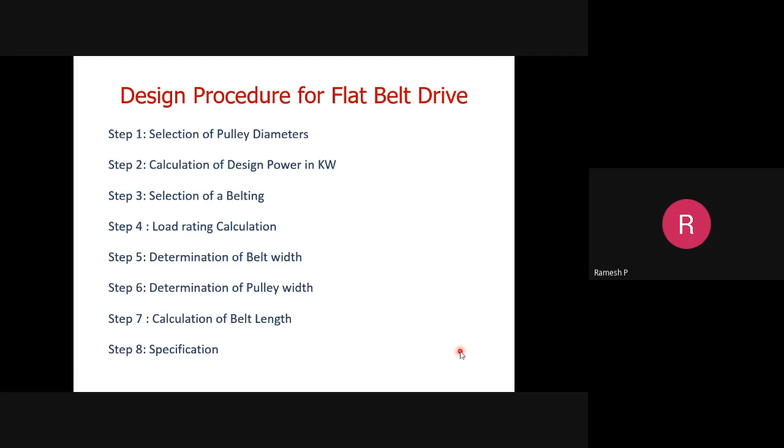So we have discussed this. The design procedure of flat belt drive involves 8 steps. We have also seen the 8 major steps. And as I said earlier, this will be the team.

I will provide assignment questions, and meanwhile at some time I will ask questions. We will treat this like a game. I used to calculate the scores for individual teams. We will work on this.

Okay, these are the procedures. I hope you have seen it. And this is where we concluded in the previous session, and I have even provided this as homework. Already you are at home, meanwhile a classwork at your home.

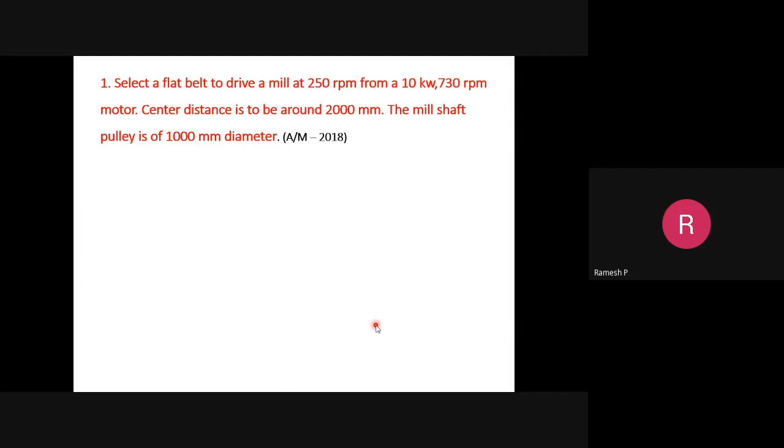So the part B, first question. We will commence the session by designing a solution to this problem of flat belt drive. So I'll read out the question: Select a flat belt to drive a mill at 250 rpm from a 10 kilowatt 730 rpm motor.

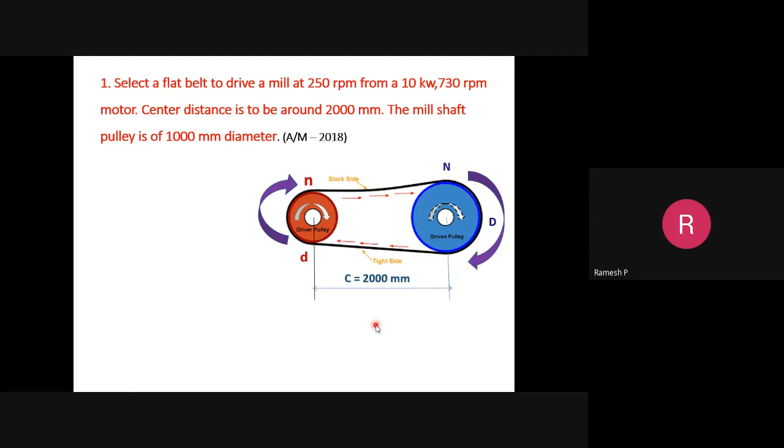Center distance is to be around 2000 mm. The mill shaft pulley is of 1000 mm diameter. It is clearly mentioned this is a flat belt drive, which is operating for a milling application.

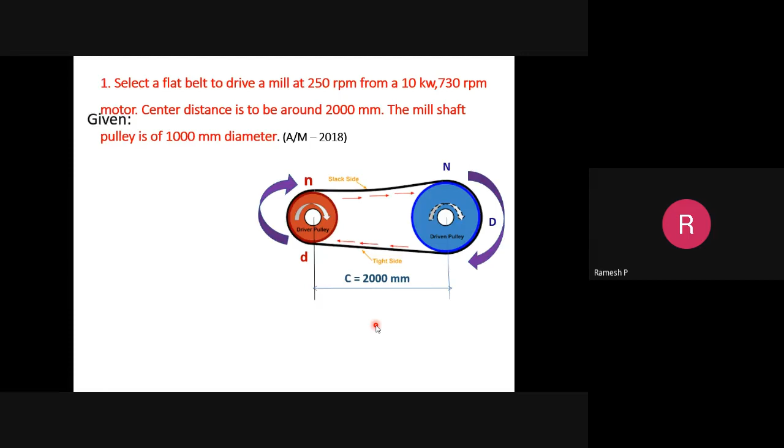Here they have provided the speed of driver and driven. As I have already mentioned, the driver or driving pulley notations, I suggest you look upon this notation because it makes sense and looks similar when compared with other texts. So the smaller case n and smaller case d refer to the speed and diameter of the driver pulley, and the larger uppercase N and uppercase D represent the speed and diameter of the driven pulley, or follower pulley.

So here you have to read the question properly. One of the important mistakes students make is they quickly interpret the question and take the data in a wrong sense. Here, a flat belt drive to drive a mill at 250 rpm from a 10 kilowatt 730 rpm motor. So the motor runs at 730 rpm and the rated power provided for this design is 10 kilowatt.

They have also mentioned the speed of driven, which is 250 rpm, and the center distance is provided. Center distance is the distance between the centers of both pulleys, between the center point of the driver pulley and the center point of the driven pulley, which is 2000 mm. And the mill shaft pulley, which is the application end, which is the driven pulley, is 1000 mm in diameter.

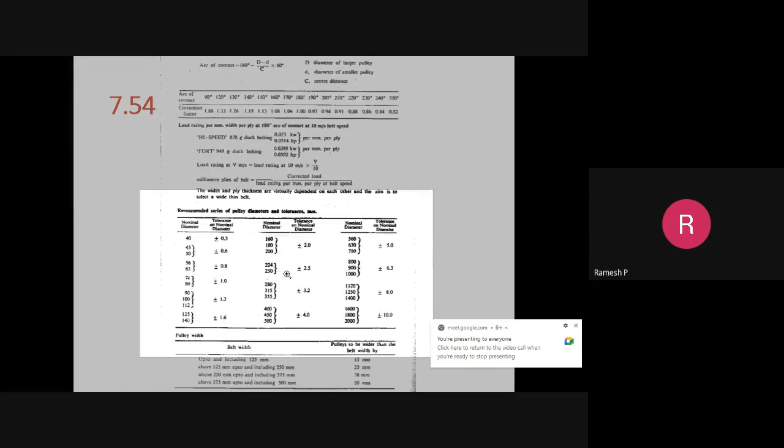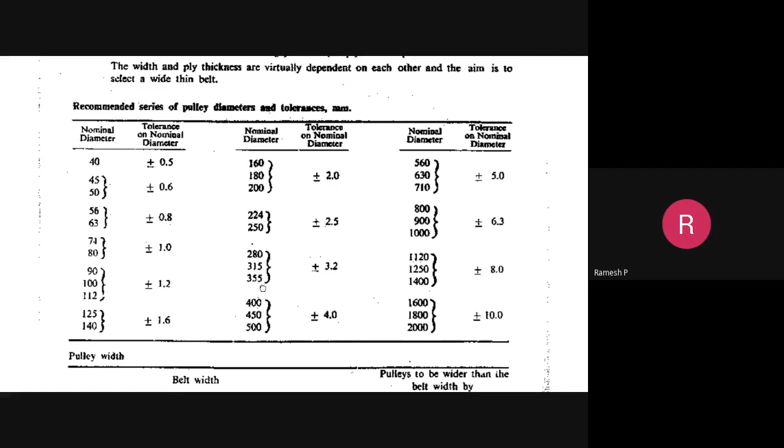How do I calculate? From page number 7.54, I used to take up recommended pulley diameter. Hope you have taken the printout of page number as I have suggested earlier. So, recommended series of pulley diameter - you have to refer this table and choose the appropriate one. So since here it is 342, always it is preferable to take the nearest maximum one, which is 355.

So whatever value you get based on the calculated diameter, you have to choose the standard recommended series of pulley diameter. So since we have got the diameter of driver pulley as 355 mm, the second step for flat belt drive is calculation of design power.

Design power is the maximum safe operating power which is needed for your design. This design power consists of various load conditions and the corresponding working environment for the belt drive. We know that design power can be calculated using the equation: product of rated power, given rated power, with the product of load correction factor, which we use to correct based on the different application where the specific component is being utilized, and the arc of contact factor.

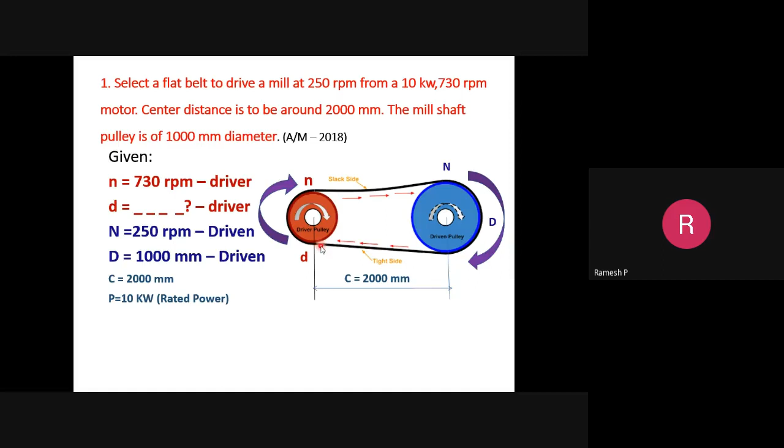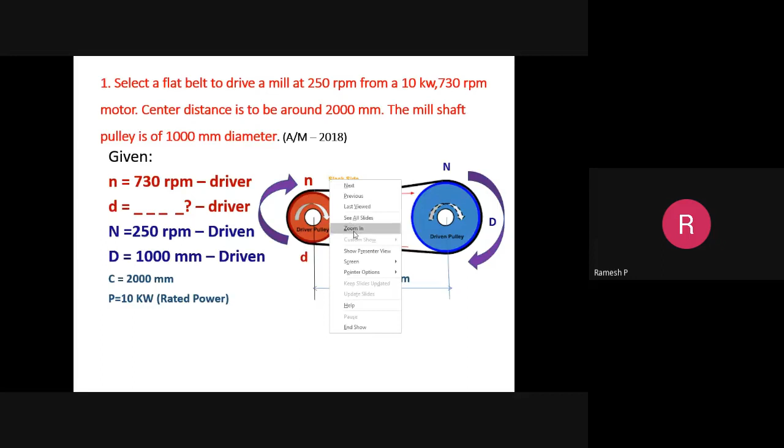What will be the arc of contact which has taken place? As I said in the previous session, arc of contact - what is it? The angular contact which exists between the pulley and the belt. The belt starts touching the pulley from this point and leaves at this point. So I calculate what will be my angle. This angle of contact, or arc of contact, is to be calculated such that the corresponding factor based on the data book gives us the product of that factor.

Okay, so rated power which is given in the question is 10 kilowatt, and the load correction factor.

How do I calculate load correction factor? I hope you did this. Here I have chosen the load correction factor as 1.3. From page number 7.53, you can choose the LCF, that is load correction factor. Here in the question it is mentioned as for the application of milling. You have to refer to the question based on which application it is provided. If it is for different printing machineries, heavy load application, compressor, evaporators - you have to choose the corresponding load correction factor based on the application provided.

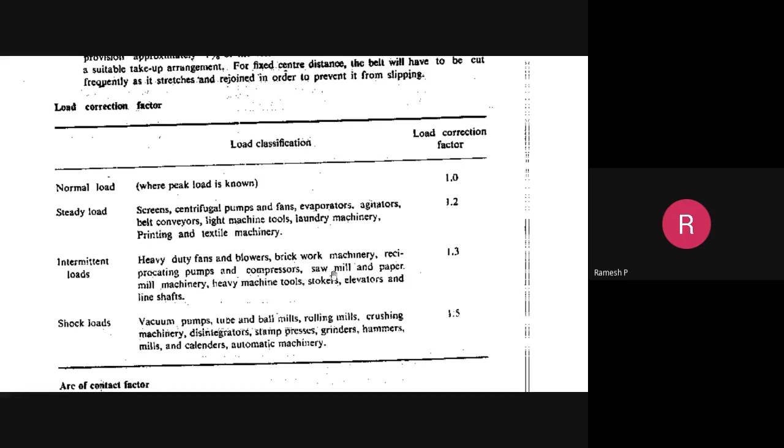You may ask, sir, what if some application is not provided? If it is just simply a flat belt drive with no application given, you can choose whatever you want - just assume a corresponding application. So here, you can refer to sawmill and paper mill machinery in the intermittent loads. Based on this, I am choosing 1.3 as the load correction factor.

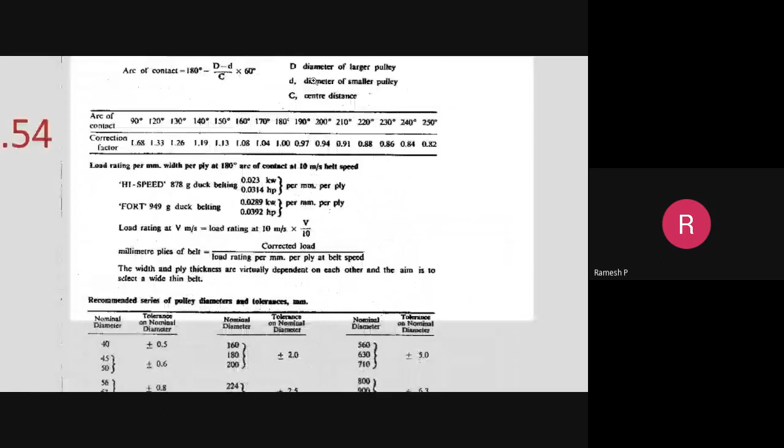So now, after load correction factor, the arc of contact factor. How do I calculate arc of contact factor? From page number 7.54, you can get the values of arc of contact. First, you have to calculate what will be my angle of contact. If you are using the data book, please follow from page number 7.54.

There is an equation for calculating the arc of contact. Since it is open belt drive, it is 180 degrees minus of (D minus d) by C into 60. If it is cross belt, there will be more angle of contact, more arc of contact - there it is 180 plus (D by C into 60), instead of minus it will be plus. So by using this equation, we calculate the degree of arc of contact, and then we take the suitable corresponding factor for calculating the arc of contact factor.

Okay, so for arc of contact we are using this equation, and if you find 180 degrees minus d by c times 60, I am getting the angular contact of 160.65 degrees.

So if you refer page number 7.54, you could get the correction factor for 160 degrees. It is 1.08. If you are getting something like 175, you can take values between 1 and 1.04, or you can take the nearest value.

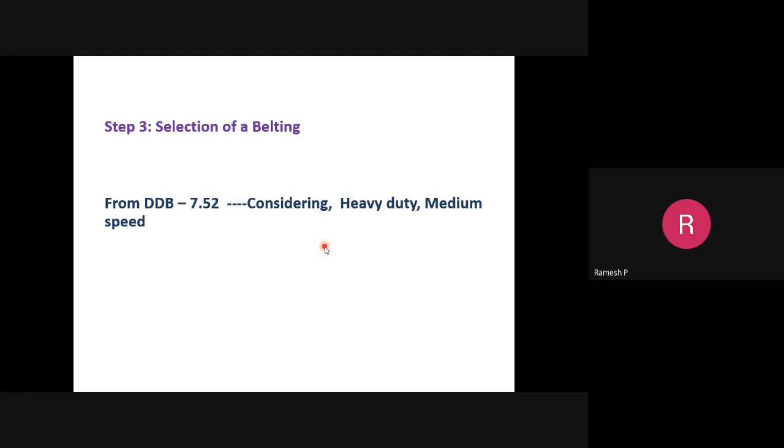Based on this, considering it as heavy duty since milling comes under intermittent load, the application demands intermittent load. Considering heavy duty, we are selecting the Dunlop Fort 949G fabric belt for this design.

Clear? Then we will move on to step 4, load rating calculation. What is the load rating calculation? It is the distribution of load in terms of number of plies and individual load per ply. That's why the unit of load rating is some constant value in terms of kilowatt per ply. Your belt may consist of 4 ply, 5 ply, or 6 ply, and this shows how load is rated per 1 ply.

Wait, yeah see, it is about you can choose because they have not mentioned here which type of mill you are going to opt for. Let me check. See, load correction factor - you can see here it is rolling mill, here it is sawmill and paper mill machinery. I'm just considering it as sawmill or paper mill. That's not an issue, either go with intermittent load or shock load.

Consider whatever you want, but try to mention it in your answers properly. I have considered the design as intermittent load since the mill alone is provided in the question for designing the flat belt drive. So I considered it as sawmill, or else paper mill. Here what you are justifying is ball mill or rolling mill, something else. That's not an issue, you can go with anything.

It is preferable to adapt to the question's specific application provided. I could mention here considering sawmill - that's not an issue. If no application is provided, you can go with any of these.

Is there any other questions? Okay, fine.

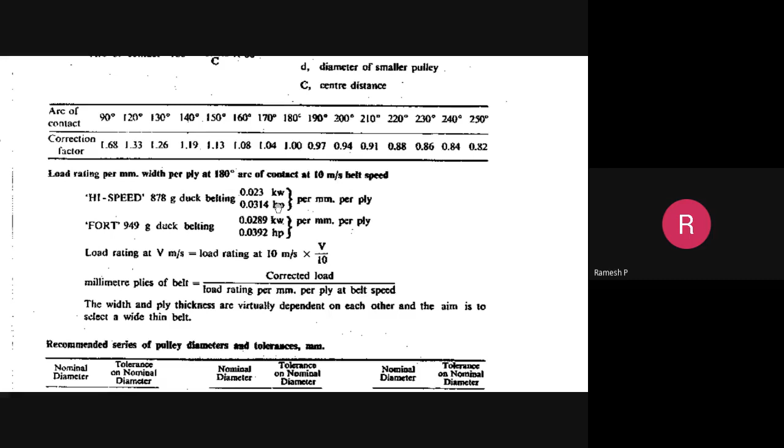Here you could refer to the load rating per mm width per ply at 180-degree arc of contact at 10 meters per second belt speed. So we are going to use this equation to calculate load rating at V meters per second equal to load rating at 10 meters per second into V by 10.

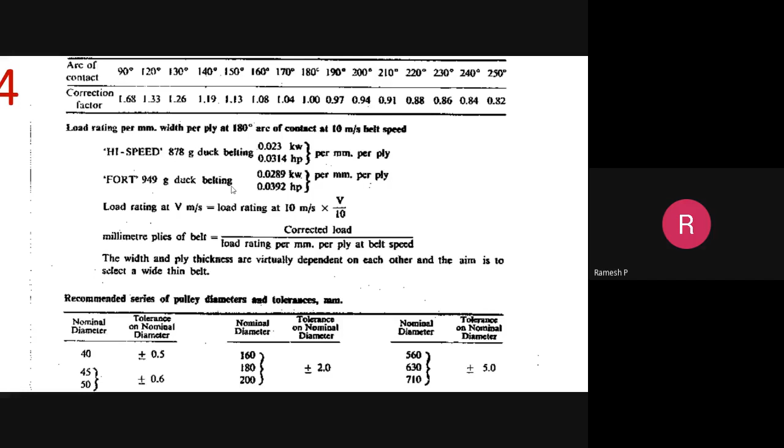This load rating at 10 meters per second is the value for your corresponding belt which you have selected based on the given inputs and application, whether it is heavy duty, steady, or light duty. We have selected 949G duck belting. Again, if the power is mentioned in kilowatt or horsepower, even if horsepower, try to convert it into kilowatt. Here power is mentioned in the question in kilowatt, so it is 0.0289. Clear?

So load rating at 10 meters per second for Fort 949G fabric belting as provided in the data book, I'm taking it as 0.0289, with velocity of the belt divided by 10. I need to calculate the velocity in terms of meters per second.

Using the velocity, this load rating we are considering entirely for the driver. So pi d n by 60. Since d is in millimeter, I am converting, taking velocity in terms of meters per second, so I'm providing 1000 in the denominator. Diameter of driver pulley 355, speed of driver pulley 730, so my velocity is 13.56 meters per second.

So now apply this in the equation provided: load rating at 13.56 meters per second equals load rating at 10 meters per second into 13.56 by 10. This value is 0.0289 kilowatt, which we took from the data book page number 7.54. So my value of load rating is 0.0391 kilowatt per mm per ply.

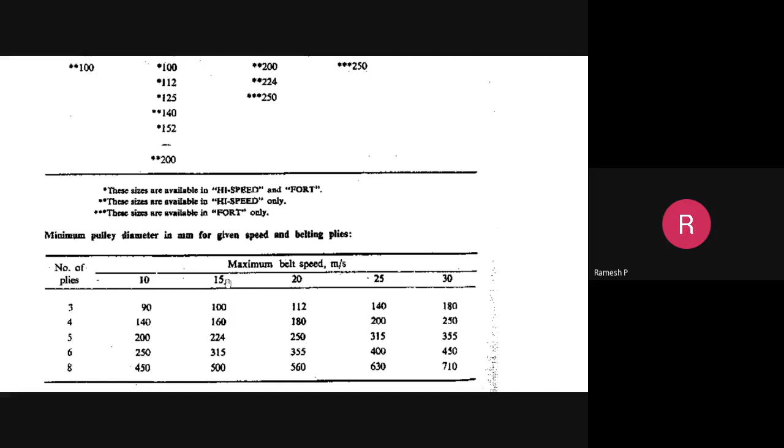So here for the velocity of 13.56, choose it. Here it is given for the velocity 10, 15, 20, 25, 30. It is 13.5, so the nearest standard velocity provided is 15. So for this 15 velocity, for the diameter provided here, corresponding minimum pulley diameter provided here, so the d value of 355 mm, it is 100, 160, 224.

Refer this column alone for the velocity of 13.56, we are selecting 15. In this column, I'm going to look at the d value of 355. So here it is what? The nearest one, I'm selecting the nearest one, which is 315.

You may ask me, what if I select the maximum one? Because it is always preferable to go for the next standard value, there is no issue in that, there is nothing wrong in that. I'm saying we are looking behind the procedures; it is not a numerical value that will change to a much larger one. Very major changes won't occur in the final result. So you may go for number of plies as 6 or number of plies as 8.

Since there is a lesser difference between 6 and 8, my number of plies, I am selecting as 6. Already the velocity is 13 and 355. So I am taking or assuming the number of plies as 6. Based on this value, I have the design and the value of load rating, and the number of plies. Based on this, calculate the width of the belt.

Then the last step is calculation of the length of the belt. How do I calculate the length of the belt? Using an equation from page number 7.53, which is 2c plus pi by 2 times (d1 plus d2) plus (d1 minus d2) whole square by 4c.

So for 7.53, if you refer to that page number, you may see it gives belt length equations for open drive and crossed drive. For cross belt drive, you have to choose the corresponding equation; the only difference is instead of minus, it will be plus, an addition, since cross drive consists of more angular contact.

So I'm choosing the open flat belt drive length calculation, the length of the belt calculation, using this equation. Based on this, we will calculate it. We have all the data needed: center distance, diameter of driven pulley, and diameter of driver pulley. It's just direct substitution.

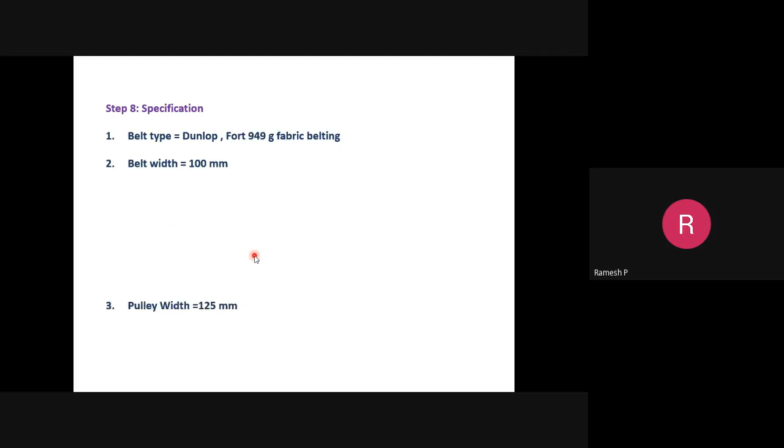Okay, you may get the length of the belt. That's it. Specification, you have to write, as I said, each and every specification. Write the type of belt. It is Dunlop Fort 949 g fabric belting, and the belt width, again pulley width. This thing you have to write the standard one, not the calculated one. You have to write only the standard one. Length of the belt, number of plies, diameter of driver pulley, diameter of driven pulley, center distance.

Okay, so very simple one. If you are able to understand how do we take the data correctly, it is very easier. Okay, we will have just 2 minutes. If you have any doubts, please.

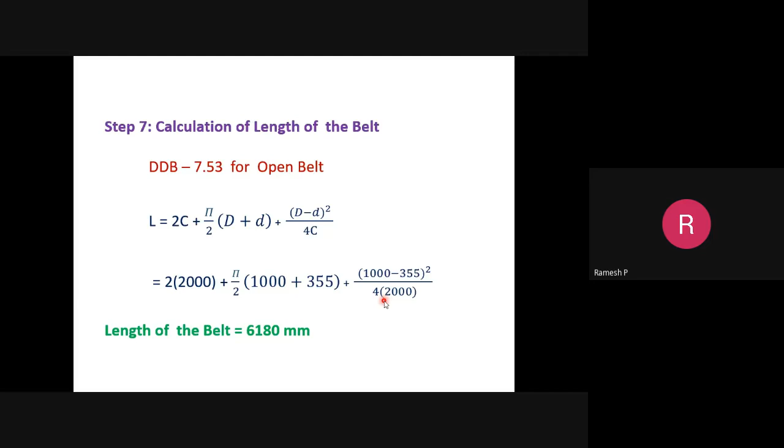Okay, step 6 also. Determination of pulley width. We have calculated the belt width, and from page number 7.54, as I said, the pulley width should be wider than the width of the belt. So based on the belt width, you may refer to 7.54, it is mentioned as up to 125 mm, the pulley should be wider than 13 mm. Like that, and later at the next stage, maybe wider than 25.

So I'm just adding the belt width towards the 13 mm and standardizing. From page number 7.55, the tabular column on the left, I am standardizing, choosing the next standard value. You may even choose this as 112, no issue, no problem with this. There is no one to check if your answers are exactly 125.3 or like that, that won't make any sense. They used to observe whether the sequence of procedures are followed properly, units are mentioned, the data books are properly referred, and the values are standardized.

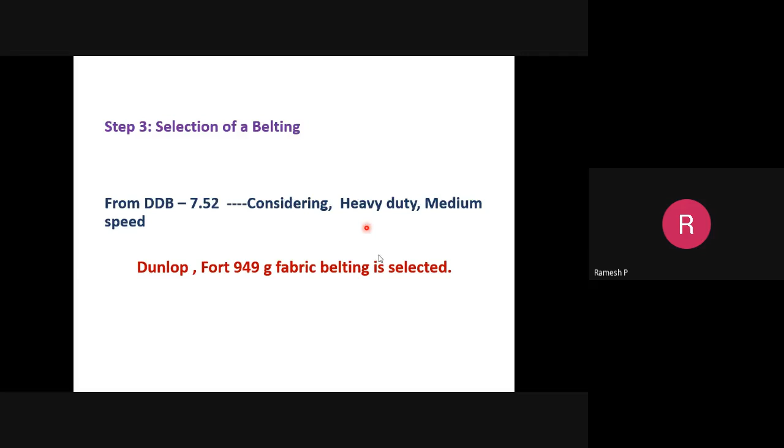Okay, concentrate. So this is another university question. A stone crushing machine - the application is clearly mentioned, it is a stone crushing machine.

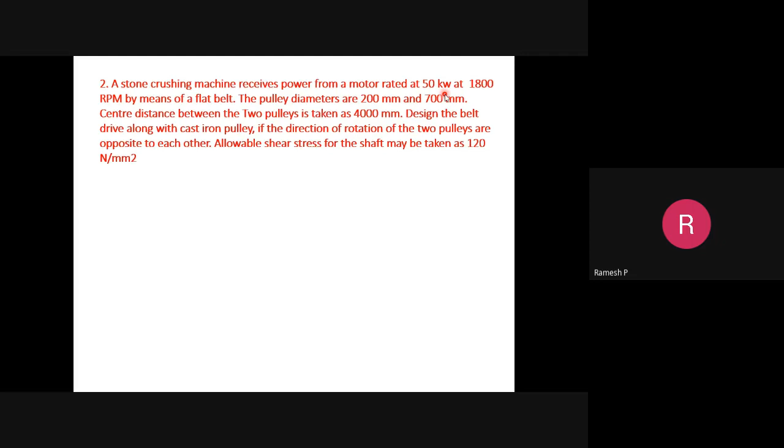It receives power from a motor rated at 50 kilowatt. Sorry, this is a mistake, please don't mind because I have not edited it properly. Power is 50 kilowatt, don't take it as 10, it is 50 kilowatt.

And at 1800 RPM by means of a flat belt. So the major mistake students used to make is considering the speed as either driver or driven - they interchange the speeds by misunderstanding the question properly. You have to read it again and again.

Stone crushing machine receives power from a motor - the motor is the driver, rated at 50 kilowatt at 1800 RPM. Normally the motor is considered the pinion, it is a smaller pulley and runs at maximum speed. On the application end, it is a larger pulley which runs at a minimum speed.

So N, the smaller n, 1800 RPM, which acts as driver by means of a flat belt. The pulley diameters are 200 mm and 700 mm - the diameter of the driver pulley is 200 and the diameter of the driven pulley is 700 mm.

Center distance between the two pulleys is taken as 4000 mm. As I said, the center distance is 4000 mm. Design the belt drive along with cast iron pulley - you have to refer this.

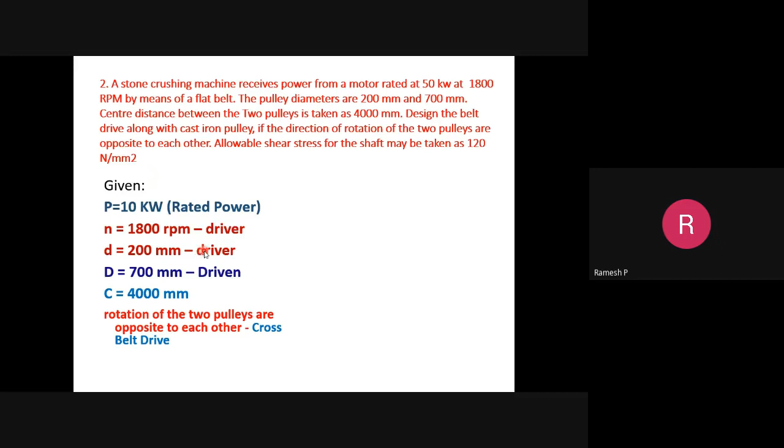We have taken all the given conditions. The initial thing before you commence to design based on the problem constraints provided is to just extract, interpret, and extract all the given inputs clearly without any mistakes. So then, cross belt drive.

I hope you have understood about cross belt drive yesterday. Here they have mentioned the direction of rotation of two pulleys are opposite to each other - exactly consider the smaller pulley as driver. So tight side tension rotates in the clockwise direction. Since it is a cross drive, instead of open, here we are crossing it, so it changes the rotation. So the rotation of two pulleys are opposite to each other.

We will proceed with this, please solve along with me. I need you to interact, I need you to respond with the answers. We may have a tutorial session, but I need you to practice. So similar to the previous step, first one, selection of pulley diameter.

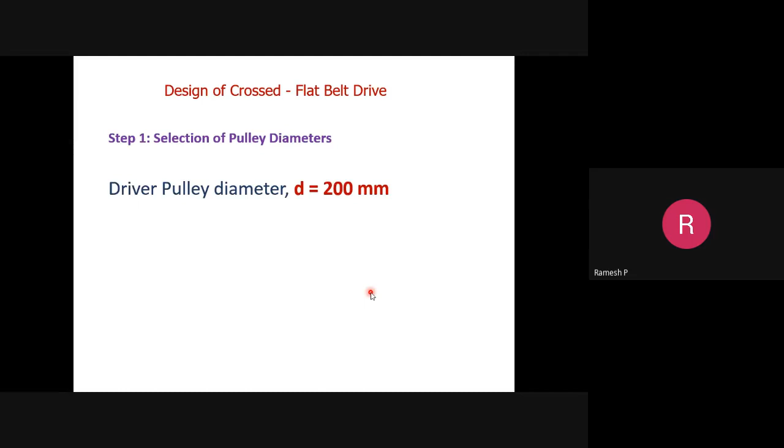So here I don't want to use the velocity ratio equation and so on. Why? Because they have directly mentioned the diameter of the driver and diameter of the driven pulley. So I'm just writing it directly.

Next we'll go on to calculation of design power. What we have to do is, the rated power is provided. Since you have to calculate using the rated power, you have to change it. It is 10 kilowatt. If there is a mistake, please change the rated power to 10 kilowatt.

And the load correction factor. For the load correction factor, please refer page number 7.53. How we have to proceed for choosing the load correction factor: we have to refer to what application the flat belt design is for.

So here it is stone crushing machinery. Look for the specific application provided here. This comes under shock loads, that is heavy duty, and the load correction factor for stone crushing machinery is 1.5. Consider it 1.5, and it is heavy duty. As I said, if it comes under normal load and steady load, consider it light and medium duty. If it is intermittent load and shock load, consider it heavy duty.

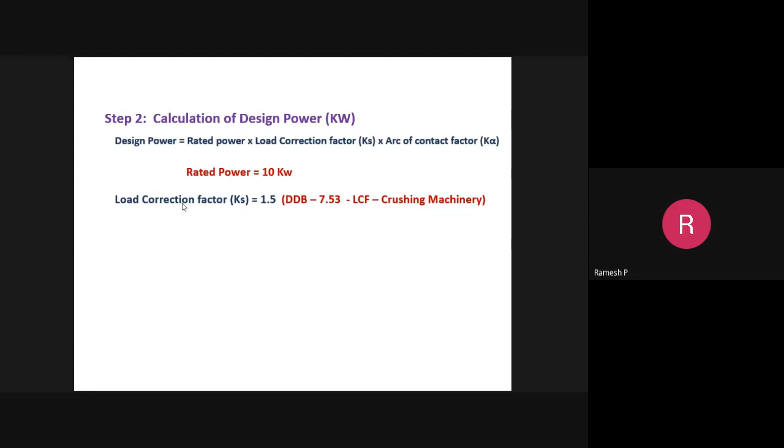So we have taken the load correction factor for crushing machinery and the arc of contact factor. For the arc of contact factor, I have to refer page number 7.54. The important thing here is we have to note the changes for open belt and cross belt drive. For cross belt drive, there are small changes in the equation we use to calculate the angle of contact between the belt and the pulley: 180 minus D minus D, but instead of minus and minus, we use addition, plus and plus.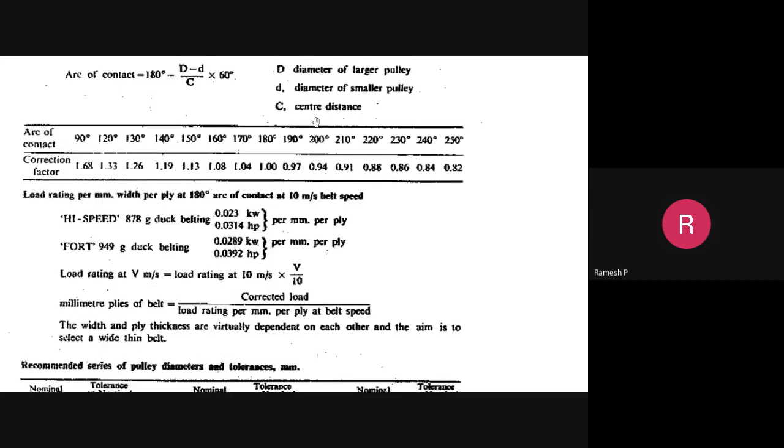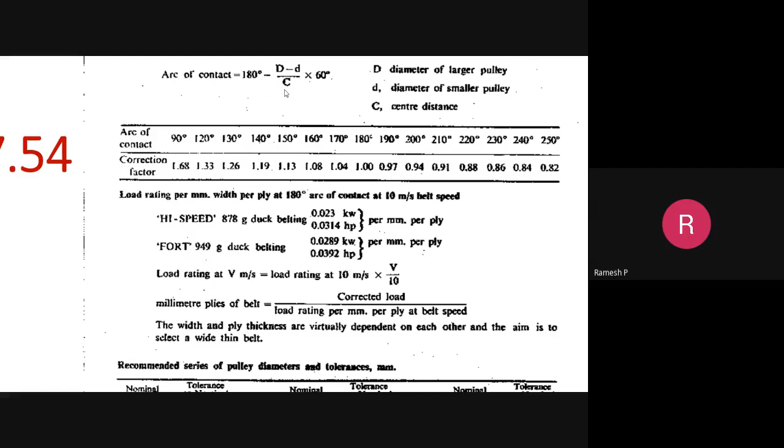Referring to page number 7.54, in the data book we have only the arc of contact for open belt drive. But don't use the same one for cross belt drive also. I have seen most mistakes happen here, let me explain this.

You may observe the angle of contact exhibited between the open belt drive and cross belt drive. In cross belt drive, we get maximum angular contact, more than in open belt drive. In open belt drive, the angle is around 180 something. In cross belt drive, we may have more angular touch - the belt touches or passes over the pulley over more surface, and that is why instead of minus, it is mentioned as plus.

So using this, calculate the angle. If I calculate the angle, I get an angle of 193.5 degrees. So for this 193.5, the arc of contact factor is 0.96, referring to the tabular column provided in page 7.54. For 196, I'm choosing the next one, which is 0.94.

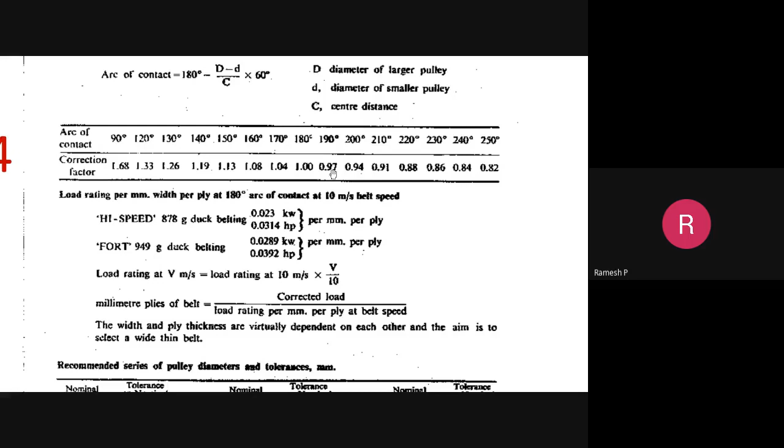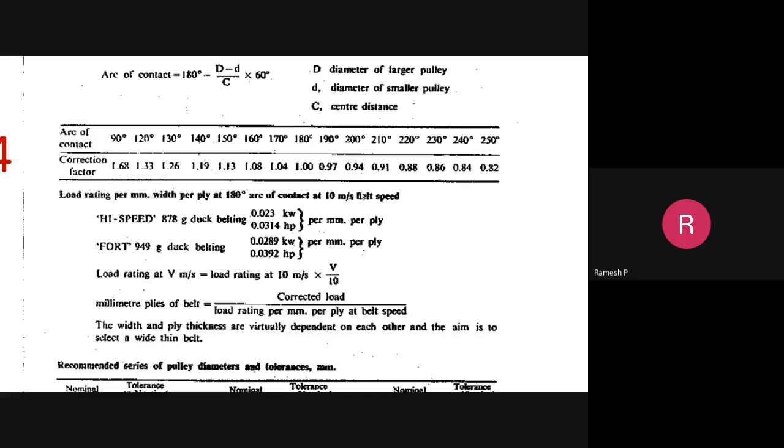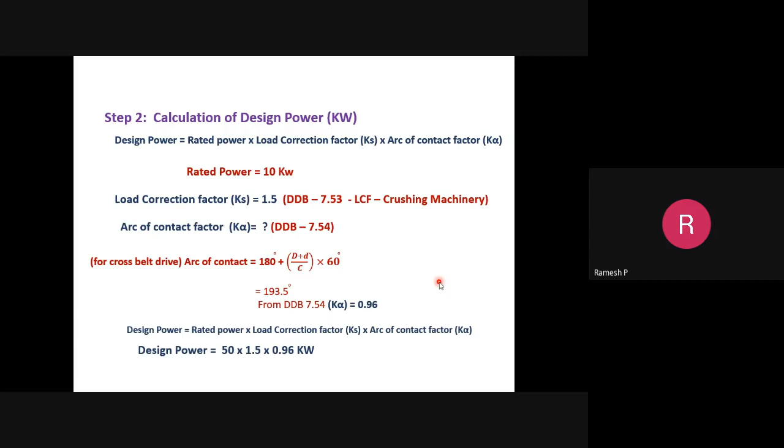So for calculating the design power, we have identified and selected the load correction factor, arc of contact factor, and the rated power was already given in the question. Please excuse me for this mistake - it is 50, not 10, it was a typo error. So design power equals rated power times load correction factor times arc of contact factor. So I'm getting my design power, which is 72 kilowatt.

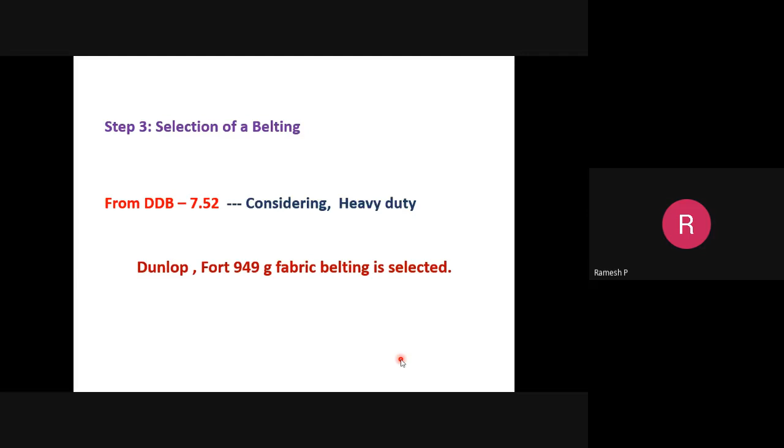So what is the next step? Selection of belting. How do we select the belt? As I said, it's based on the type of application provided. Here it is shock load. So just like the previous problem, considering it is shock load, heavy duty, stone crushing machinery, the Dunlop Fort 949 g fabric belting is selected. Again, I will refer to page number 7.52.

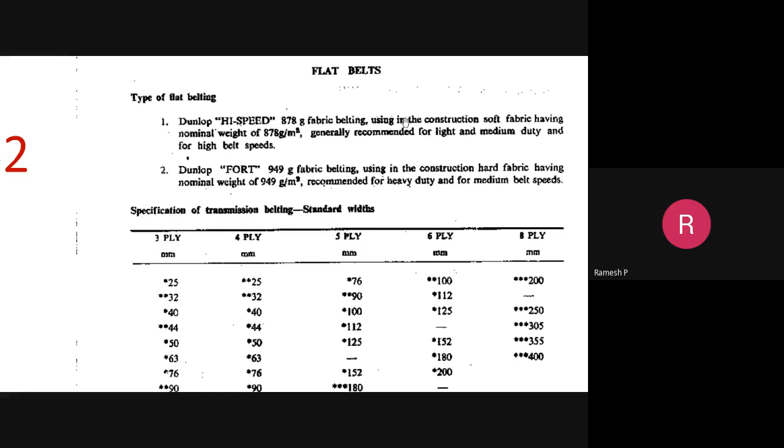So there are two different types of belt, either chosen based on light or medium duty, or based on heavy duty. For light and medium duty, the first type, Dunlop high speed 878G fabric belting, is recommended. And for heavy duty, Dunlop Fort 949 g fabric belting is recommended. That ends step 3.

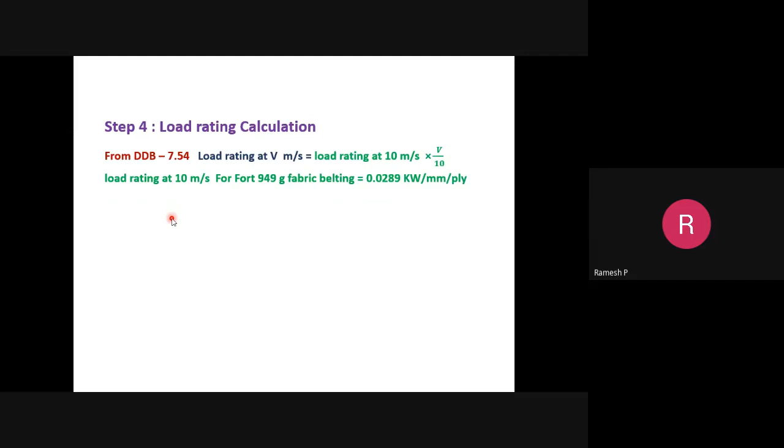Step 4, load rating calculation. Just like the previous problem, we have an equation to calculate the load rating at V meters per second equal to load rating at 10 meters per second multiplied by V by 10. We have selected Fort 949G fabric belting, where 0.0289 kilowatt per mm per ply is the value for load rating at 10 meters per second, provided in the data.

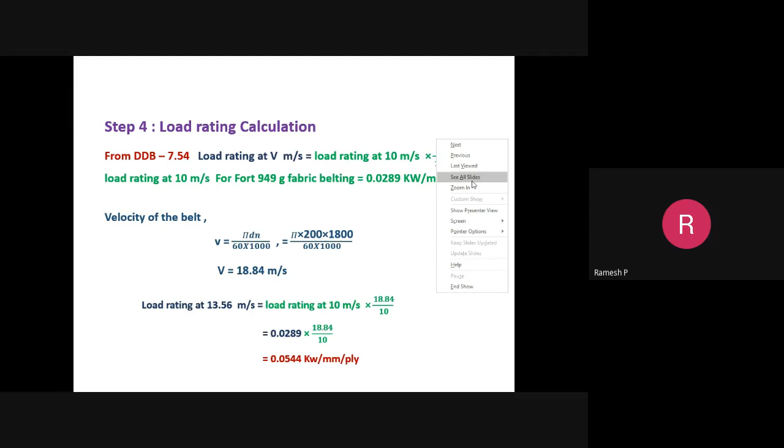So I need to calculate the velocity of the belt. For the driver pulley, I have the diameter and speed, and I've calculated the velocity as 18.84. Substituting this velocity value into the load rating equation, I get 0.0544 kilowatt per mm per ply as my load rating. I'll show these load rating calculations in the 7.54 data book.

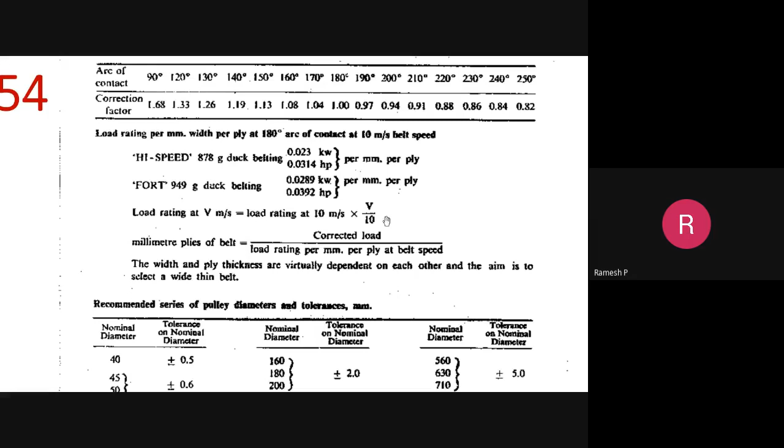For load rating, we utilize this equation provided in the data book: load rating at V meters per second equals load rating at 10 meters per second into V by 10. We calculate V as velocity, pi DN by 60, in meters per second. This load rating at 10 meters per second is a constant provided for two different types of belt. We selected 949G, with value 0.0289 kilowatt. Clear? Understood?

Moving to step 5, determination of belt width. As said earlier, we calculate the belt width using the equation: design power divided by load rating into number of plies. We've already calculated the design power and load rating. Now we need to select the corresponding number of plies needed for our design.

For that, from page number 7.52, we need to look at the velocity value calculated in the previous step for load rating, and the corresponding diameter of the driver pulley, 18.84 and D equal to 200. So look at page number 7.52.

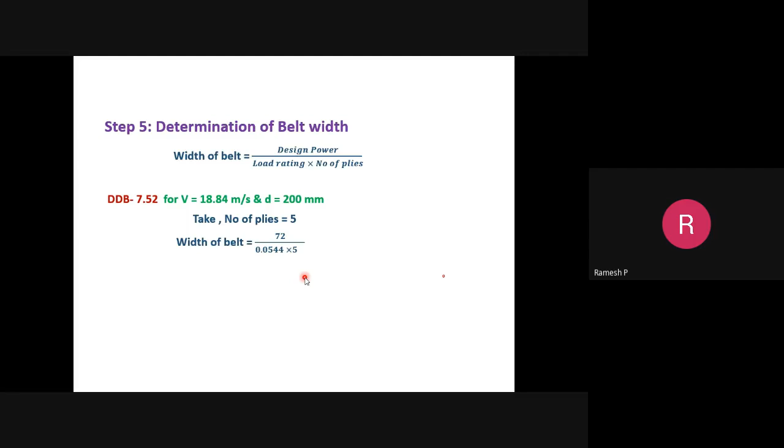Let us apply these 5 plies in the width of the belt equation. We get an answer of calculated width of the belt as 264.70.

Similar to the previous problem, select the standard belt width. Here you could note there's a difference: the recommended standard belt width for 5 ply exceeds the standard one. If this is the scenario, you can increase the number of plies to make the design safer. I'll explain this again.

Here the width of the belt is 264.70, and we have to look at the standard belt width. The standard belt width for 5 ply, the maximum one recommended for 5 ply, is 250 mm. In that scenario, we are facing a design that is not safe. So to make the design safer, I'm increasing the number of plies in the belt.

So we are selecting it as 6 ply. For 6 ply, for the calculated value, I'm choosing the next standard one, which is 250. Just apply the 6 ply in the same similar equation, I'll show you.

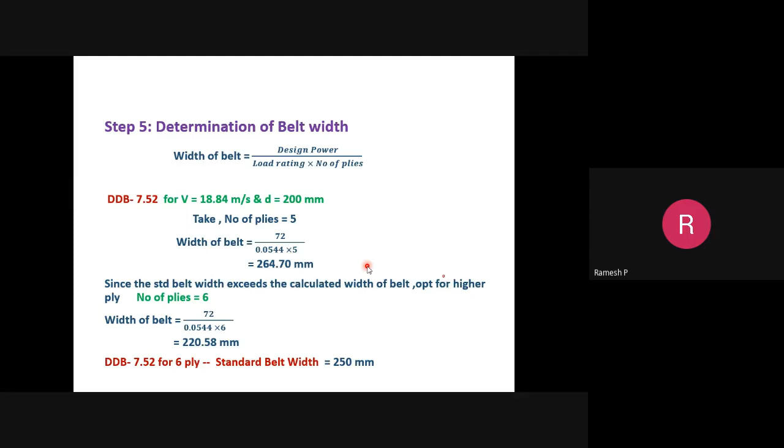I am trying to choose different problems like how we are going to face it while designing a flat belt.

So the next one is determination of pulley width, similar to the previous one, based on the belt width. Here standard belt width is 250 mm. Look upon page number 7.54 for the pulley width.

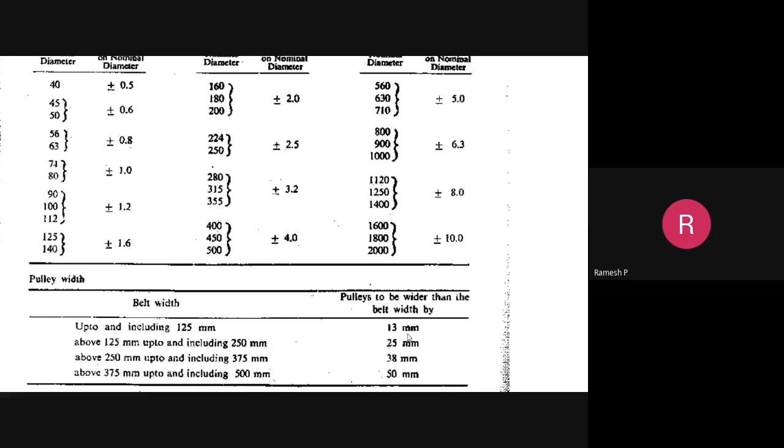Since up to 125 mm is the previous limit, lesser than 125. Here it is between 125 to 250 mm, the second slab. You may take a note here, it is including 250. So we have got the standard belt width of 250. We are just summing up, adding 25 mm to the existing belt width such that the pulleys are wider than the belt width. So it is 250 plus 25 mm.

That gives 275. What I have to do again is standardize this pulley width. I have to choose the standard pulley width value based on the design data book, page number 7.55. Go to page number 7.55.

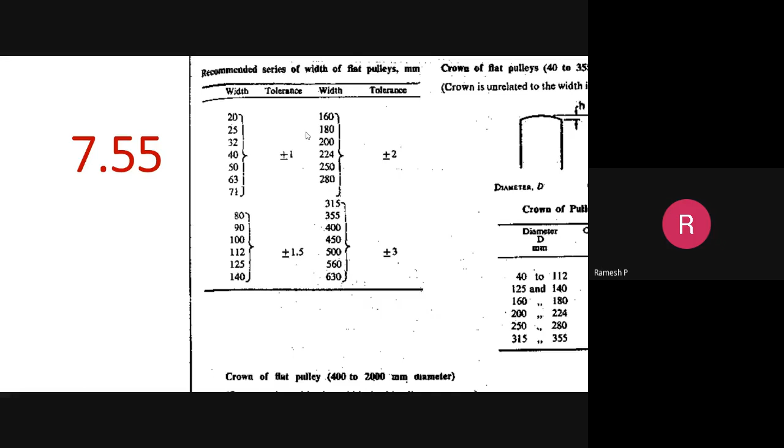Recommended series of pulley width. So here you have got what will be the next standard value after 275. It is 280. So my standard pulley width value is 280. You have to choose this. If you are making mistakes, not standardizing the value, then there will be error. You have to ensure following the procedure, we have to standardize.

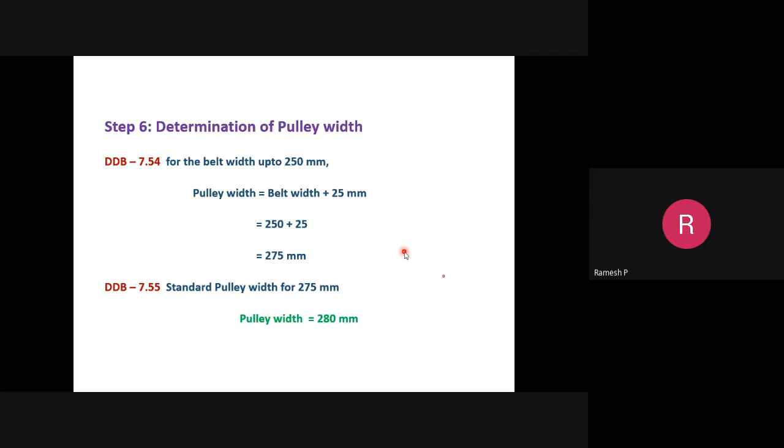So then after this, calculate the length of the belt. After standardizing, we have got the pulley width of 280 mm. Next one is calculation of length of the belt.

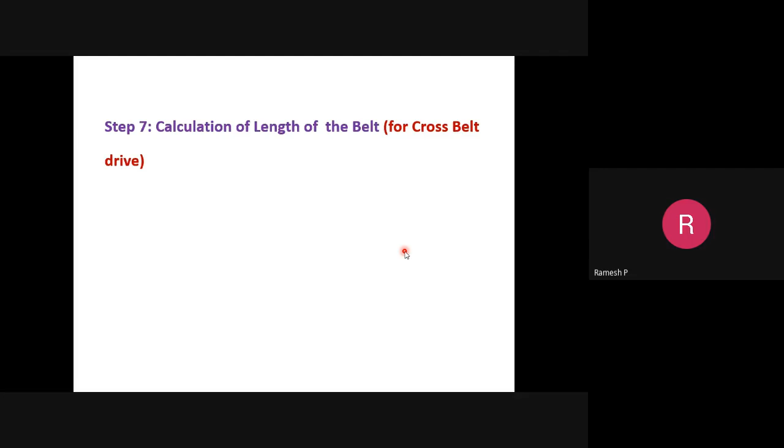Take a note here, it is a cross belt drive. So for a cross belt drive, you will have changes in arc of contact. The equation of arc of contact and changes in equation of length of the belt. So page number 7.53, go for the equation provided in cross belt drive.

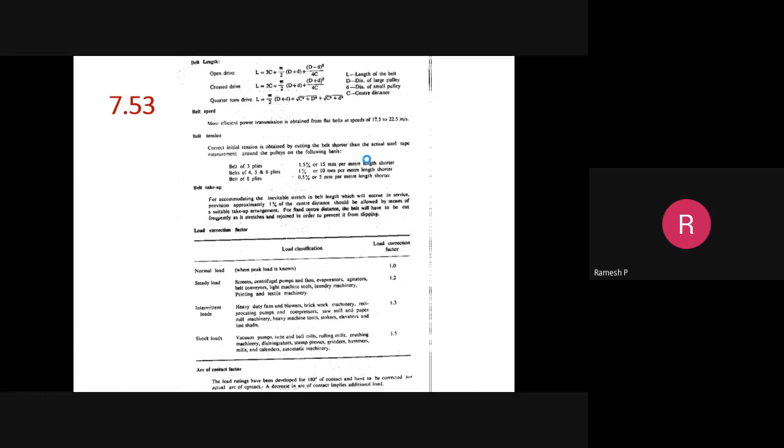Just a small difference, instead of subtraction, here it is addition. We already know, we have already calculated the center distance, calculated the diameter of driven and driver pulley. So using that, we will be calculating the length of the belt, cross belt.

Just direct substitution, but even in the small substitution you may make mistakes. Some students used to calculate the entire thing, 2c plus pi by 2 into d plus d, plus d plus d whole square by 4c, all at once, and they used to find errors. If you are well versed in this, apply suitable brackets and calculate the corresponding length.

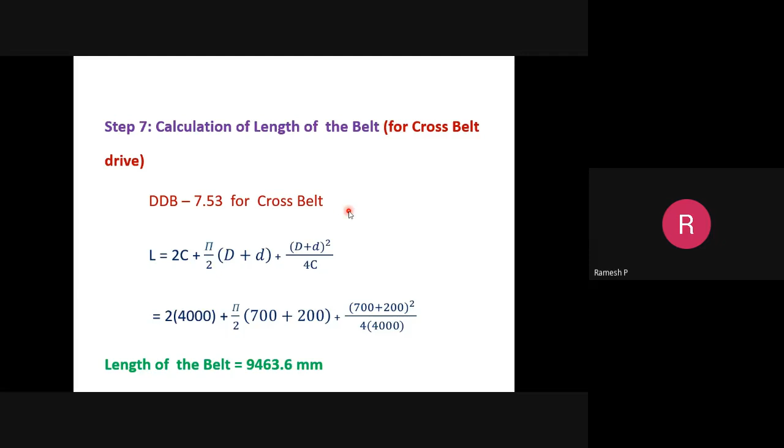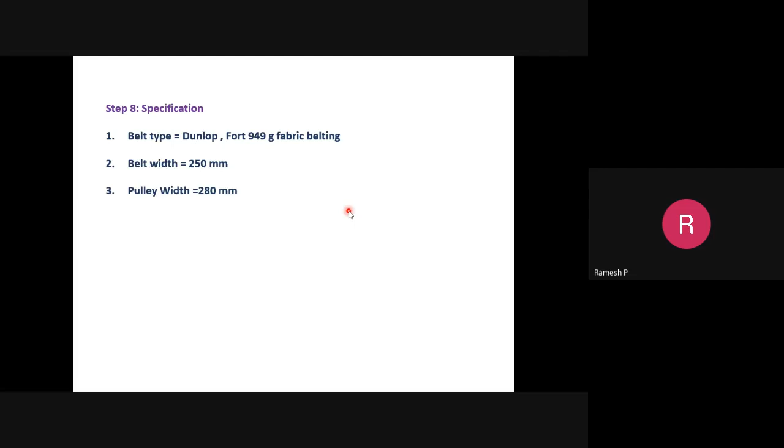So it is around 9464 mm. After this, apply the specification, write down all the specifications. Step number 8 starts with belt type, belt width, pulley width, length of the belt, number of plies, diameter of driver pulley, diameter of driven pulley, center distance, and so on.

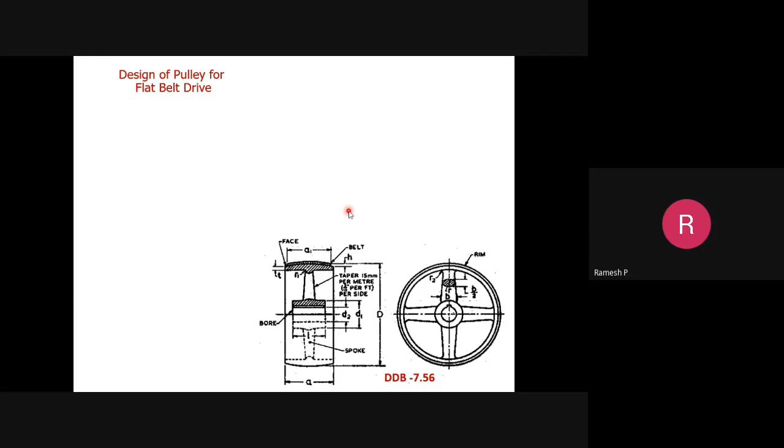So the newer thing in this problem is to design the pulley, flat belt pulley, cast iron pulley. Here in the question, it is mentioned to design the pulley along with the flat belt. So it consists of a small 4 steps.

It starts with dimensions of pulley. I hope we have discussed that pulley, pulley for flat belt, the belt runs over the pulley surface. So I have to calculate the diameter of pulley, width of pulley which is represented A, diameter of pulley which is represented as D, and thickness of pulley rim which is T. What is the rim thickness?

The next one is dimensions of arms, various arms. The total number of arms here is 4 arms. It can be 4 arms, 6 arms, sometimes 8 arms. And the cross section of arms, here you could see it is elliptical section, the standardized one for cast iron pulley, which is elliptical section, and the major axis is near the boss.

This is the boss, and the major axis will be the major axis of the elliptical section. I use this to calculate B, the value of B. And meanwhile, radius of cross section, R value, we have to calculate. These all come under dimensions of arms.

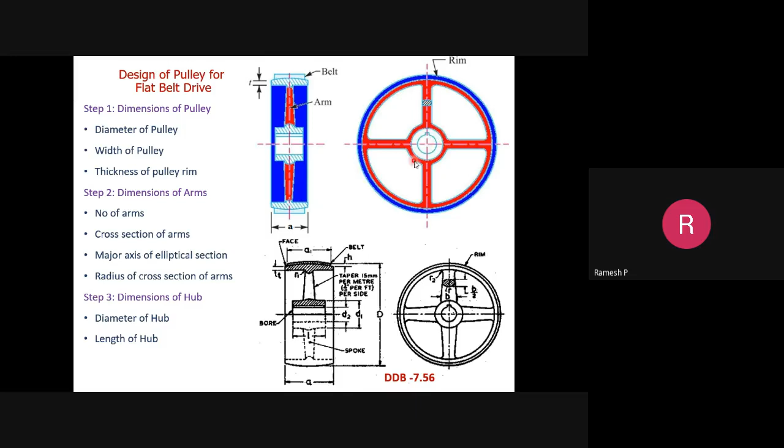The next one is dimensions of hub, the middle one. I calculate the dimensions of hub, that is diameter of hub and length of the hub, using the equation.

Finally, crown height of the pulley. We have seen a crown — a smaller crown in the pulley which prevents the belt from moving out while the pulley is moving. It's just a small height, either 2 mm or 4 mm, based on the thickness of the belt. This crown height is placed there.

These 4 steps you have to include if the design procedure demands you to design the pulley. Okay, quickly we will explore this. First one, dimensions of pulley.

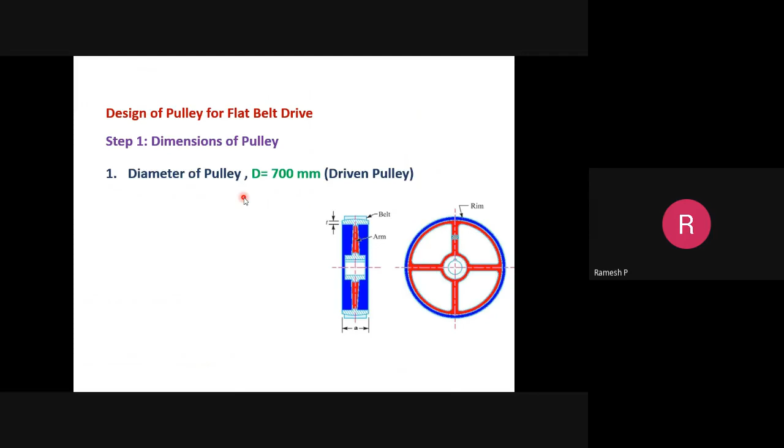For this, already we have calculated diameter of pulley, which is uppercase D here, for the driven pulley.

5 more minutes, sir. Sorry, sir. Parthiban sir, 5 minutes, 5 minutes. Yeah, okay sir, okay sir. Okay sir, I'll complete it.

So the next one is width of pulley. Already we have calculated the pulley width, mentioned here as A, which is 280 mm. And the thickness of pulley rim — how do I calculate it? How do I calculate the T value?

The T value can be calculated using equation 7.57. If you have the data book, please refer to 7.57. Here you get the thickness value, T value.

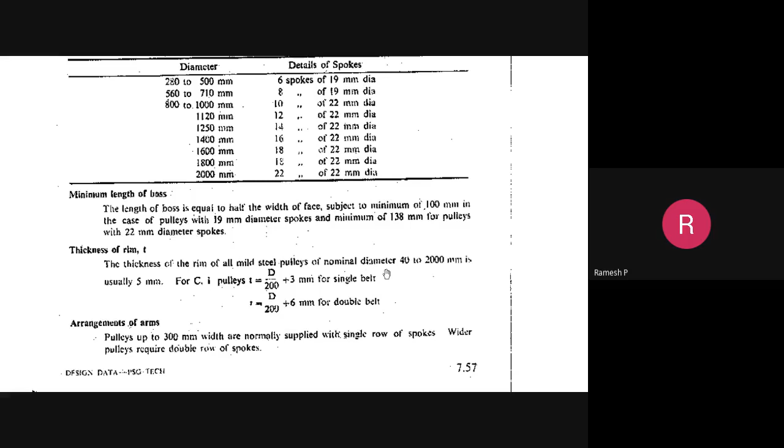T equals D by 200 plus 3 mm for single belt. Here we consider it as a single belt, since we have not specially mentioned any additional belts in the question. So directly substituting the D value, we get the thickness. That's step one, very simple.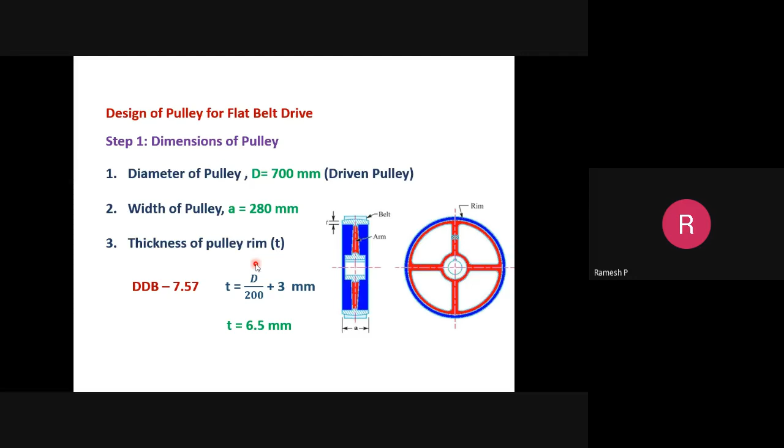Next one, dimensions of arm. As I said, I take the number of arms from page 7.56 — the total number of arms. This 7.56 helps a lot for this entire step 2 in pulley design, which is dimensions of arms.

The number of arms is 4 for diameter up to 450 mm, and 6 arms for diameter over 450 mm. In our case, the diameter of pulley is 700 mm, so we are going with 6 arms.

The next one is cross section of arm. By default it's an elliptical cross section in the cast iron pulley. Another step in dimension of arm is calculation of major axis of the elliptical section, that is thickness of arm near the boss, which is 2.94 times the cube root of (AD by 4n).

So what is this? N signifies the number of arms — here N is 6. A and D we already know: D is diameter of pulley, A is width of pulley. Using that, we calculate the major axis of the elliptical section.

And lastly, radius of cross section of the arm: R equals 3 by 4 into B. So B, which is the major axis of the elliptical section, we calculate here.

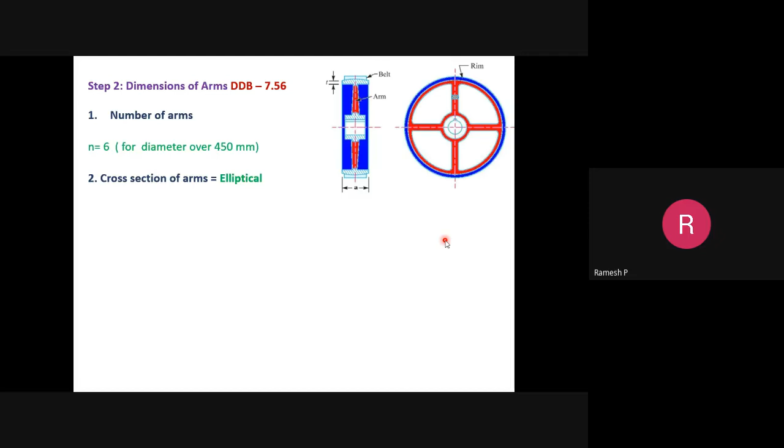Now we look at all this in step 2. As I said, number of arms is 6, cross section of arms is elliptical, and for major axis of elliptical section we apply the equation from the data book to calculate the B value. Based on this, we calculate the radius of cross section of arm, which is 3 by 4 into B, giving us the R value. This is step 2.

Step 3, dimensions of hub. I need to calculate the hub diameter. There is an equation to calculate the diameter of hub: it is 2 into diameter of shaft.

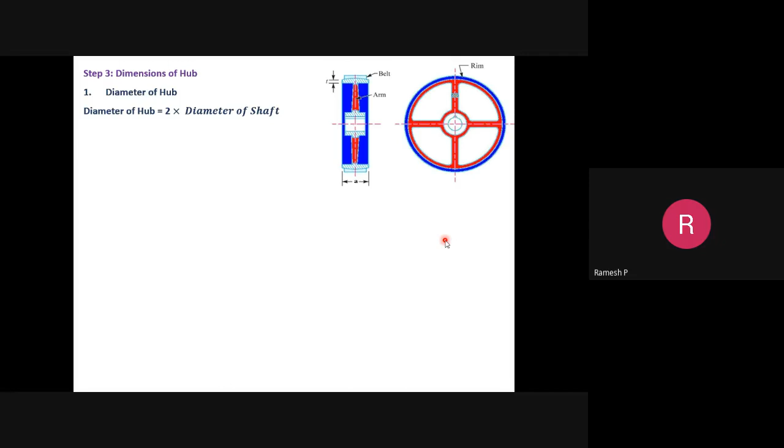Calculating the diameter of shaft is exactly similar to how you calculate it in design of machine elements and strength of materials, using the same power-torque equation. So we'll use torque equals P into 60 by 2 pi n.

This is design power, not rated power, in terms of watt. Here we are following design power in terms of kilowatt, so enter design power in terms of watt. This gives the corresponding torque in Newton meter, which you convert into Newton millimeter.

So I have got torque in terms of Newton meter, convert that into Newton millimeter, and apply this torque in the shear stress equation, pi by 16 into shear stress into d cube. The shear stress is given in the question as 120 Newton per mm square. By using that, I calculate the diameter of shaft, and the diameter of hub is 2 into diameter of shaft. Simple one.

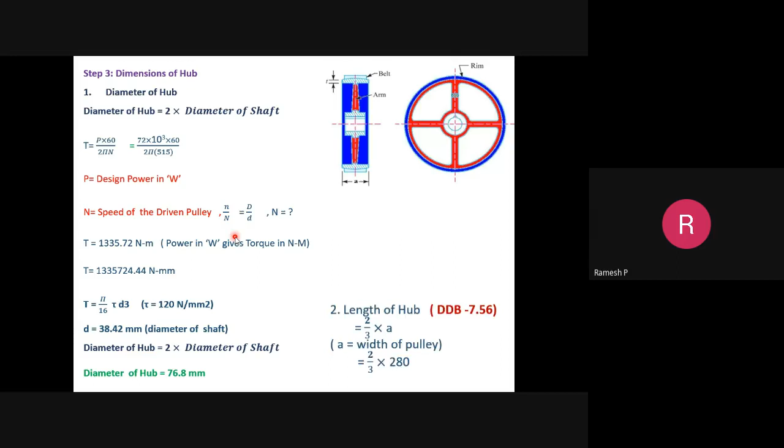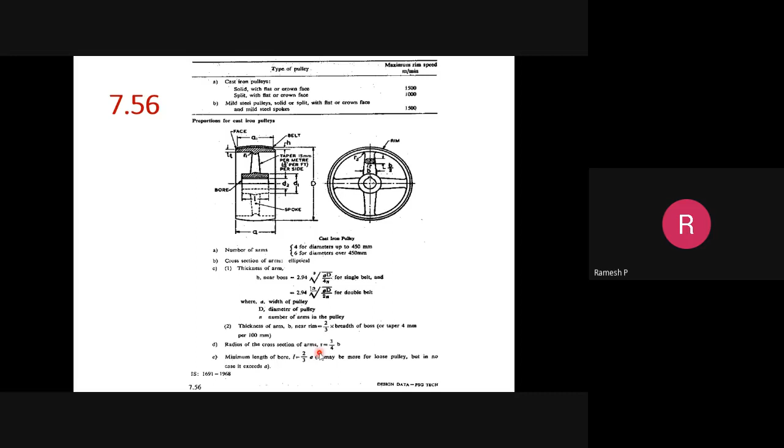Next, length of the hub, as provided on page number 7.56. It is 2 by 3 into A. You can refer to the minimum length of bore on page 7.56: length of the hub L equals 2 by 3 into A. By using that, calculate the length of the hub. It comes out to 186.6. Finally, crown height of the pulley.

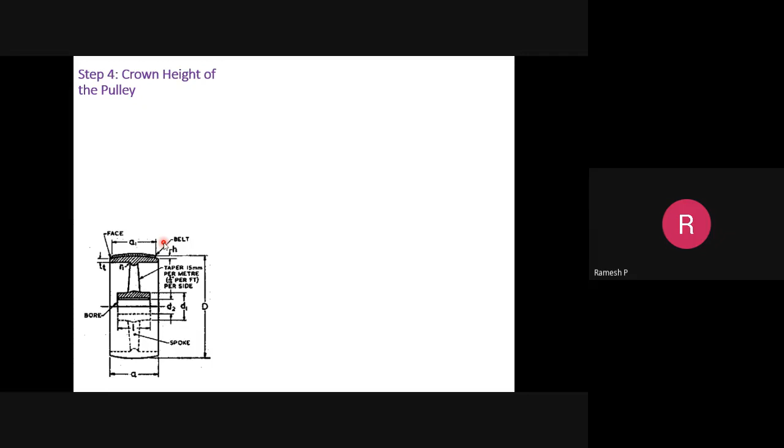The crown height prevents slippage, or the belt getting taken off from passing over the pulley. For this, we have to utilize the tabular column provided on page number 7.55.

For the pulley diameter of 700 mm, refer the pulley width of 280 mm, and you will get the corresponding crown height value. For the diameter of 700 mm, going by the table, it's 630, 710 range. For pulley width A equal to 280, the range is 280 to 350. So for 710 diameter and 280 width, the crown height H value is 2 mm.

So this is how you are about to design the cast iron pulley.

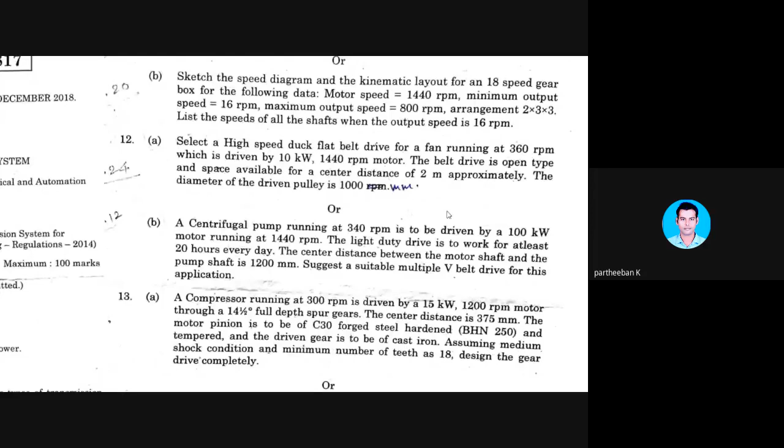Sir, yes sir, Ashish Kumar, please show all the slides once sir. Yeah, okay sir, can you hear me? Yes sir, yes sir, yes, possible sir. Okay, yeah okay sir. Ashish, let me show, okay.

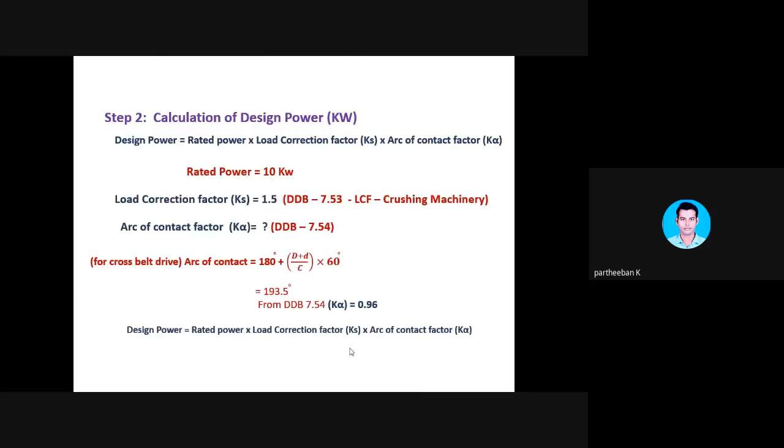Either this problem or the previous one.